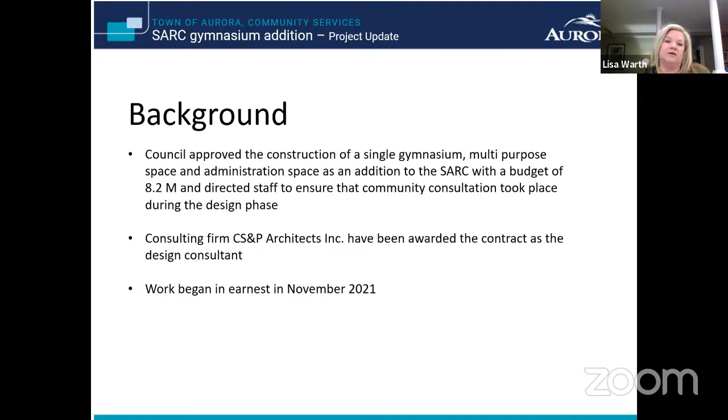So we started our work really in earnest with the consultants in November 2021.

As I mentioned, we did some community consultation, specifically with the groups interested in using this gym to provide services and programs to the community. We held sessions in November and December, and we also did written surveys for community groups who couldn't attend those sessions. We talked about the size of the gymnasium, usage, lighting, windows, acoustics, all those sorts of things, and we got some really good feedback and information.

One of the things that came out of that conversation was the desire for a double gymnasium, as it would allow for more formal competitive use. The user groups told us that a single gymnasium was just too small to run tournament-type events. We could still run competitive games, but not in that tournament format. There's also the potential that comes with having extra space for other uses like fitness classes, children's programs, summer camps, and special events like fairs and trade shows. A divider wall curtain could allow that space to be divided to accommodate multiple uses at the same time, or bigger groups of people accessing the space.

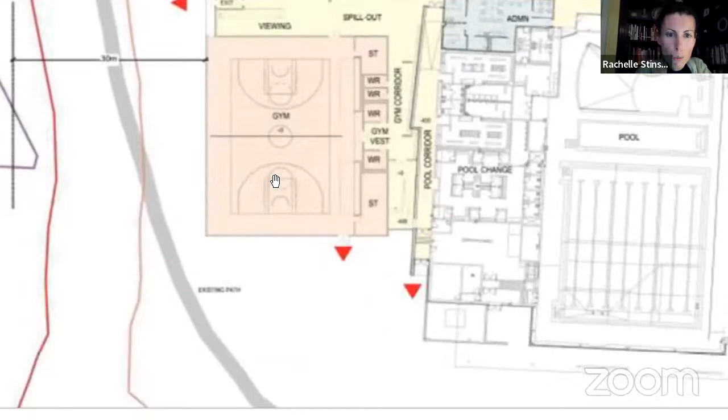I'll help get the juices flowing, Lisa. I discussed this with you in preliminary discussions. I can see on the map you've designated a couple of emergency exits—this one is existing, leaving the SARC pool, and this looks like a new exit coming out onto the wetlands, leading to the South Park or south end of the Stronach. Is there any indication we plan on creating some kind of level field here for this to be a proper emergency exit, because the grade there is quite significant? This is all staircases currently leading out of here. So if we're adding a whole new set of population coming into this gymnasium, I think that should be a strong consideration—really grading this area properly so that we have an actual emergency route that leads out over here to the east side of the Stronach.

Yeah, absolutely. That's been a repeated topic of conversation, and the consultants are very well aware of it. It hasn't been engineered yet—I don't know what it'll look like, but it's very much top of mind for the consultants in terms of that slope and that grade, and the fact that we need to engineer it in a way that's more even. And I know they weren't sure back in November, December. I don't know if there's any updates.

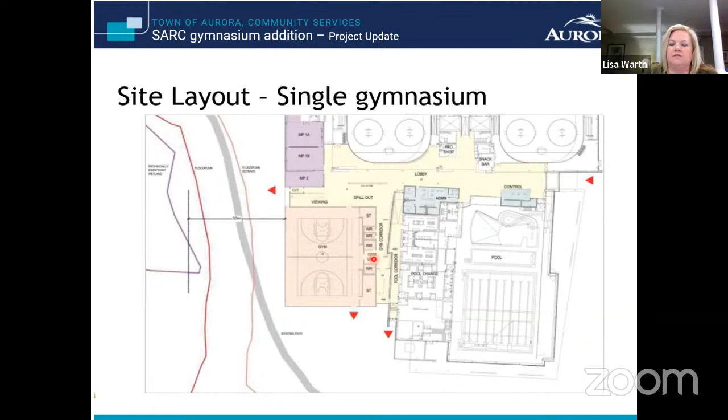Yeah, and then for the committee, just so you guys know, a couple of the discussion points I brought up were from December 14th when we met with the consultants. We discussed the grades, which I was just mentioning, and there was some discussion around the change rooms as well, the functionality there. Lisa, remind me, I think we were talking about a universal washroom being included, right?

So that was it, yep. Lisa did mention the auditory aspect, so part of the accessibility plan is doing proper acoustics at the Stronach Aurora Recreation Complex. That has been discussed as part of this gymnasium proposal, which was good. Accessibility equipment, dimmable lights, operators, and all those pieces have also been discussed as part of this original proposal. I wanted to let you guys know those things have been brought up to the consultant when I first met with them back in December.

Just food for thought in case you guys have any other questions for Lisa.

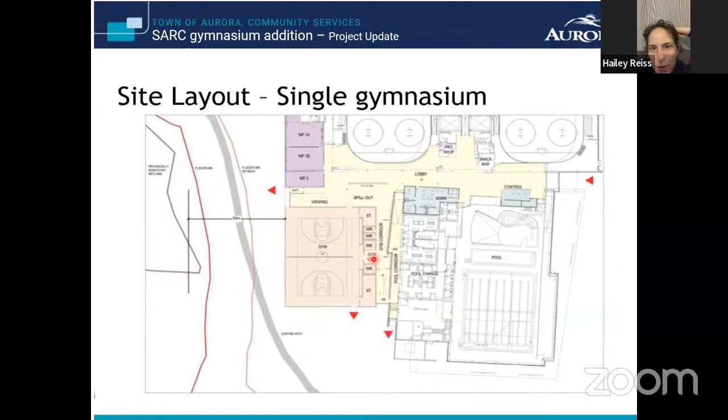I had a quick question. Can you hear me? I just can't tell. Yeah, okay. So I was just wondering, because you talked about seating and pull-out bleachers, is there a plan for spectator seating to be accessible in any way?

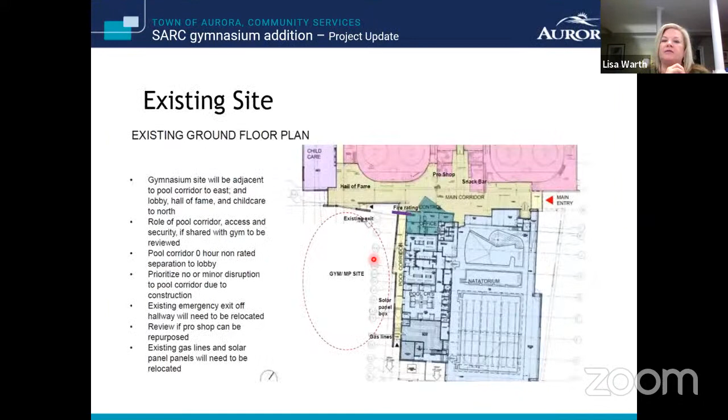Yes, and again it's all very preliminary, but there is seating. There will be additional seating within the gymnasium along the wall. What we do now at the leisure complex is just bring chairs in, since they don't have bleachers. The other thing is there will likely be a viewer area from the lobby, a glass panel, so if someone wanted to watch but didn't want to go into the gymnasium, they could just sit or stand and look right into the gym. So a couple of options there, but again, we're not finalized by any stretch.

Do we know when we'd go into a site plan application process for this, Lisa? Do we have a rough estimate? We're February now... June, okay, because we're a ways away from the final design, right? I was asking because I think all committees end in June, so if we wanted at least a round of committee comments prior to the election period, we would have to get it done before the June deadline essentially. Okay, so we'll keep that in mind, absolutely.

Yes, through you, Madam Chair, that is correct. All committee meetings will conclude in June.

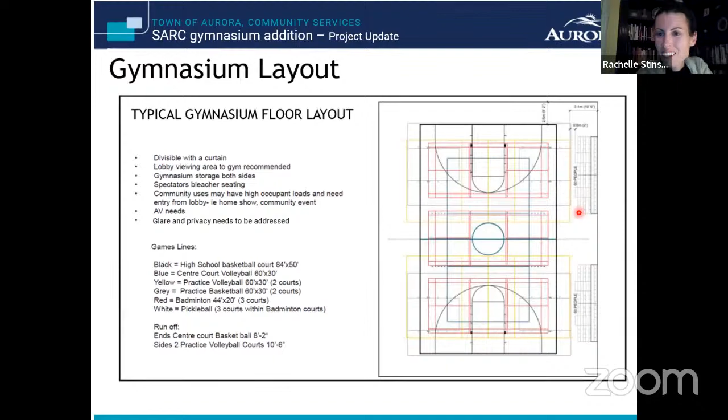Are there any further comments or questions for Lisa? Doesn't sound like there are. Thank you again, Lisa, for that presentation. You've given us a lot to think about. It's an exciting project, I think, and I look forward to seeing the site plans and viewing it more in detail.

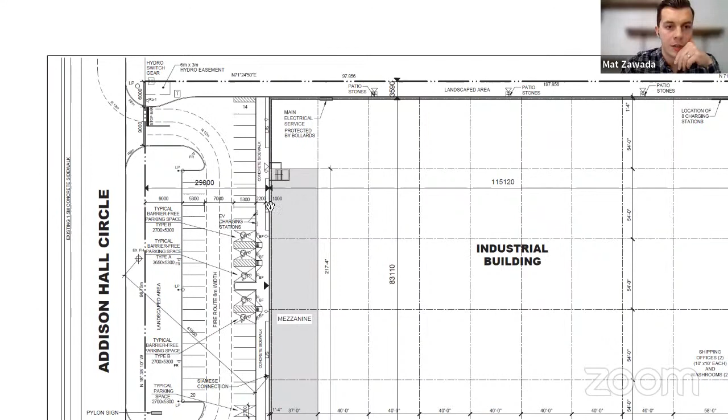As you can see, the industrial complex is quite simple. You have your entry coming into the main buildings. They do meet the requirements for barrier-free parking. They currently have 5 designated barrier-free spots, evenly distributed between type A and type B. There are 2 type A spots close to the entrance, and the outskirt ones are the type B's. Accessible aisles and curb depressions are included, and they have the barrier-free signage included in the site plan applications as well.

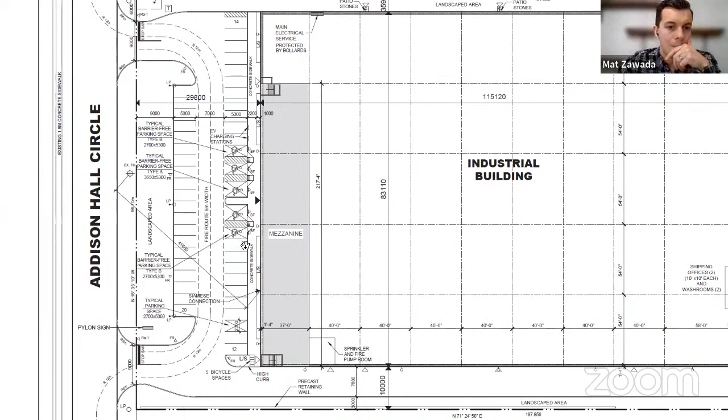They have an exterior path of travel running along the entire side of the building, leading up to the front entrance located right in the middle. And then they have a couple of emergency staircases on both sides of the building.

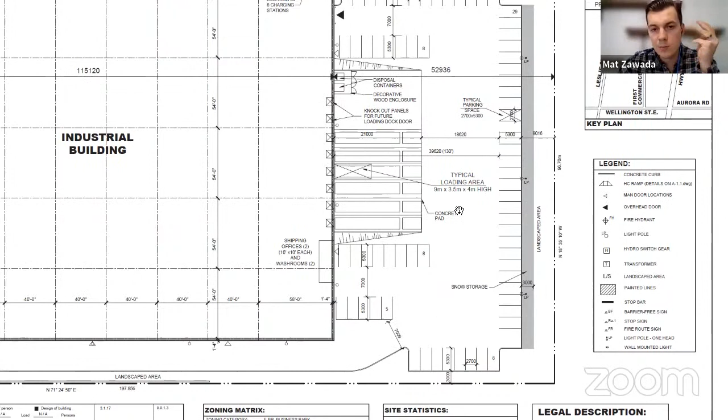Before I go into the comments, I'll show you guys very quickly the back side of the building as well. As they come around the side, they have additional parking over here—nothing for barrier-free parking. This is most likely going to be staff parking leading into the back of the building for those that don't require barrier-free parking. And you can see they have the ports for trucks to do their loading into the industrial building as well. So again, very, very simple site plan application.

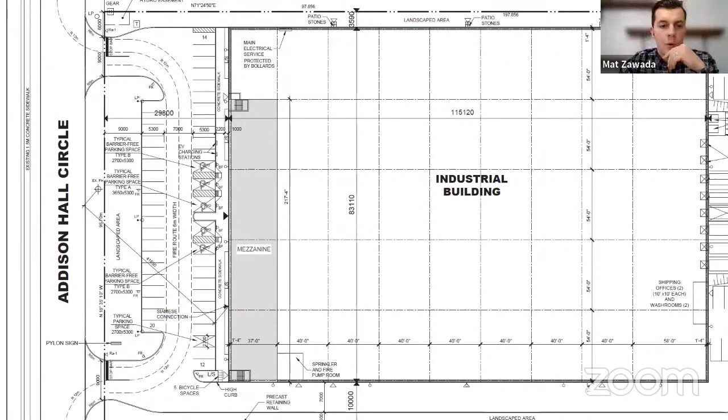In terms of comments provided for this site plan application, our regular one for the barrier-free entrances located, as discussed, in the back as well as the front, is for automatic door openers with the proper time delays to be included. Also, installation of proper tactile indicators. Since there are some proposed staircases for this building, that includes asking them for consideration towards the evacuation chairs that we've added as our standard in these site plan application requests.

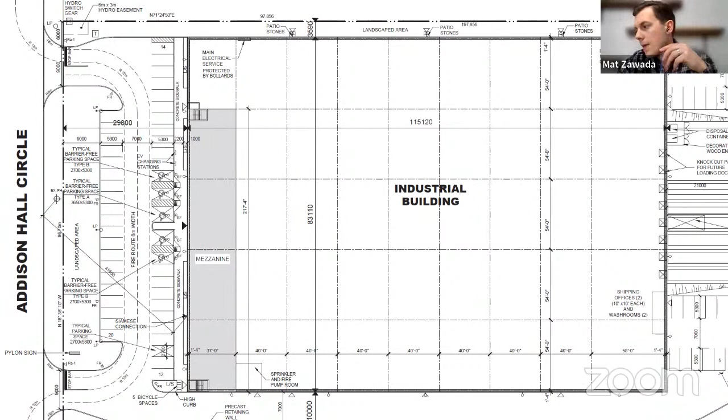Lastly, the one thing I caught here, and couldn't tell from the measurements—they have a bike rack located very close to the entrance of the emergency staircase. So I requested to ensure we at least have the 1.5 meter exterior path width required for anyone coming along this sidewalk. It's not indicated in the site plan application, so we'll see when they come back with their comments whether this meets it. If it does, it can stay, but most likely, based on what I'm seeing, I'm assuming they'll probably have to slide this a bit over onto the island, but we'll get confirmation on that a little bit later on.

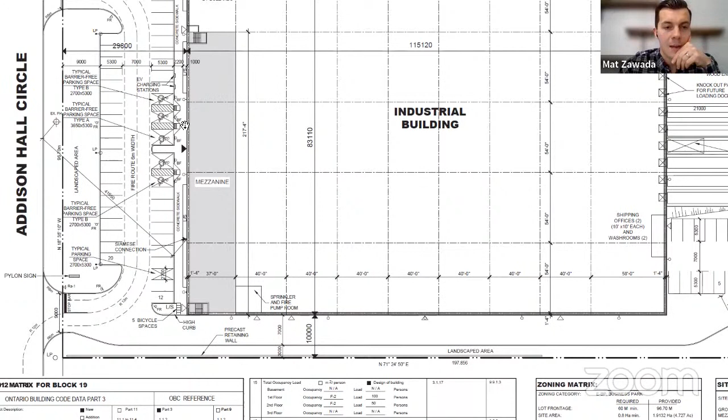The last comment I provided—I was speaking to the planners about this—it seems a little tight. You can see it is 2.2 meters, but I did request for rest areas to be included along the side of the building as well, because it is a fairly decent size industrial building. So rest areas should be included along the exterior path of travel, as long as the proposed rest areas don't impede on that 1.5 meter expectation we have for the concrete sidewalk.

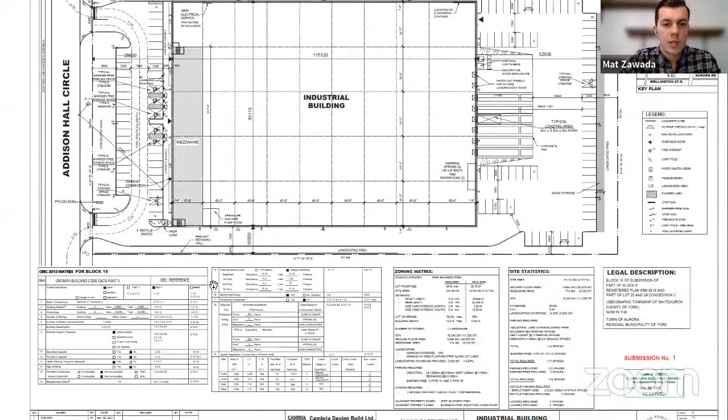I'm just going to jump over to the other drawings so we can go through them, and then if you guys have any questions, we can go through those as well.

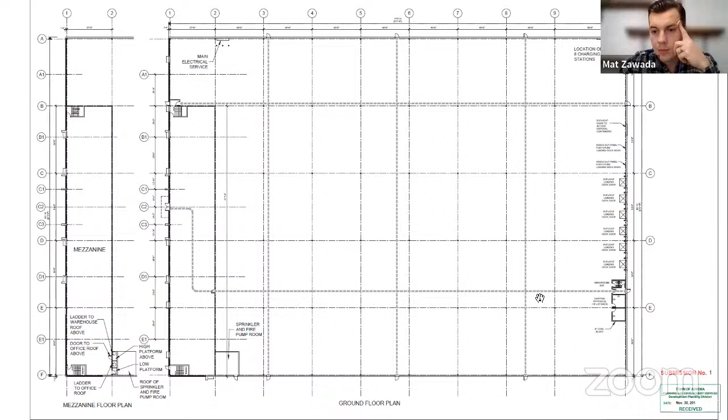So this is just taking a look at the interior. As you can see, absolutely basic at this point in the site plan application process. They just highlighted that there is a mezzanine, and again you can see we have our emergency staircases included, but not much more information past that. As you can see, there's the double doors that we requested for the automatic door openers, and then towards the back you have your loading ports, but nothing too crazy over here.

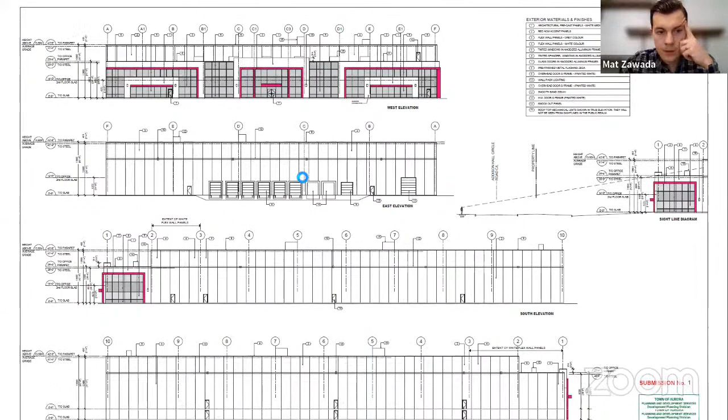Here's just an elevation view, so you can see the fronts and the backs of the building. Over here where you see these blue windows and panes, this is going to be the front of the building, and the loading docks on the back of the building over here. South elevation on this third picture, and then lastly, this is going to be your north. So these are the sides of your buildings.

And that was it. So like I said, extremely simple site plan application. I'm just going to jump back to the first one because that's realistically where you guys are going to have the most questions, if any. So the floor is open, Madam Chair, to the committee to request any other comments or questions.

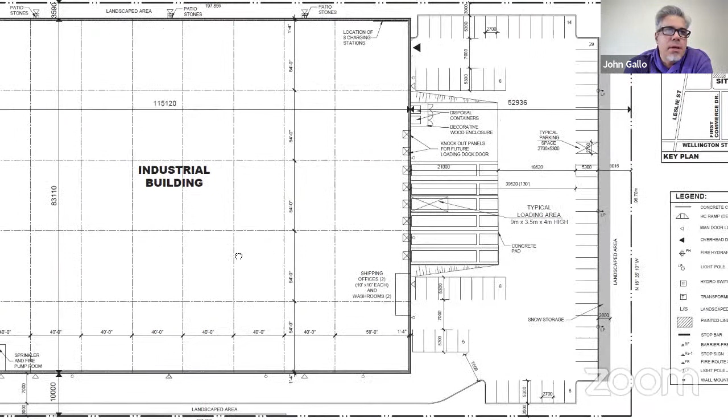All right, so are there any comments or questions from the committee? Madam Chair, could I just ask a question? Just washrooms, office space. I see some washrooms at the back. It just doesn't seem like it's a functioning space.

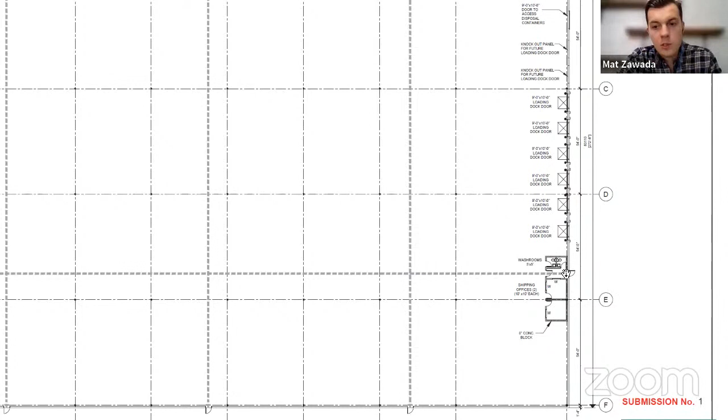Yeah, so they're not really giving us much detail in terms of what it's going to look like. You can see right now that they have indicated spaces for these washrooms. They're most likely going to have to update this based on when the planners give the Ontario Building Code piece on here, because if we zoom in, this is not going to be a sizable universal washroom. We can tack that comment onto our comments as well. But from what I'm seeing over here, this is not a universal washroom.

And based on the OBC, they do have to provide at least one in the new building. And then as you can see in the front over here, there's nothing else. But these ones, I can tell just off this, these are going to be a little bit too small to pass off as a universal washroom.

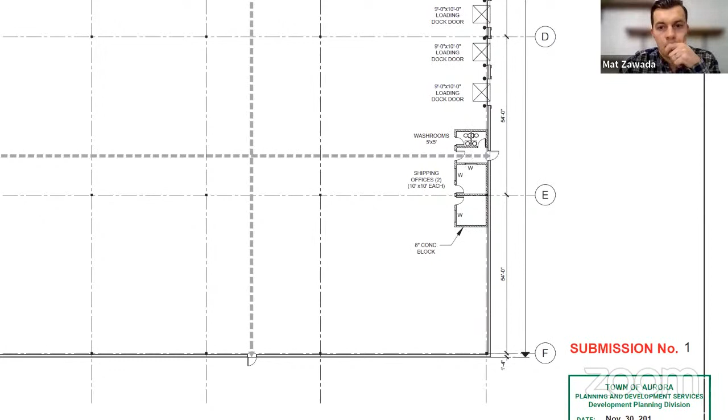We'll make those comments. Does this come back to us, or is this our one and only shot at any? Nope, nope. Usually we get about 2 to 3 submissions, so this will come back to us. Okay, that was it for me.

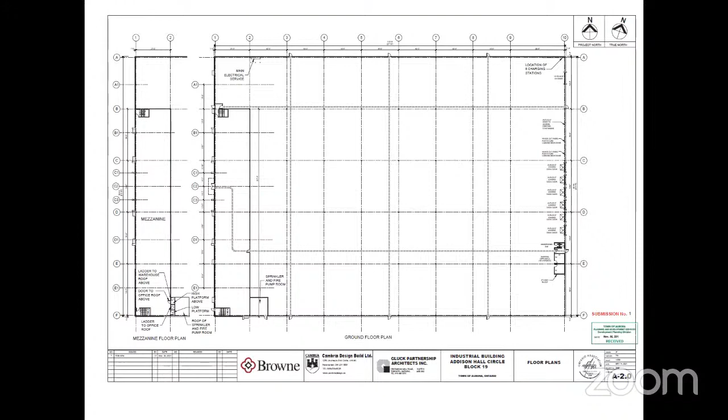Yep, I can add that comment in, just the washrooms at the back by the loading doors. One's probably a driver's washroom, the other one's probably an employee's washroom. So, and then the question about the mezzanine level, is that where the offices are going to be? We'll probably find out later, I guess.

Yeah, they're not giving much - we can zoom in on the area over here, but they really haven't provided too much information. You can see that they're indicating the ladder to the roof. They have a pump room located at the front of the building, but that's pretty much all they're indicating at this first stage in the submission.

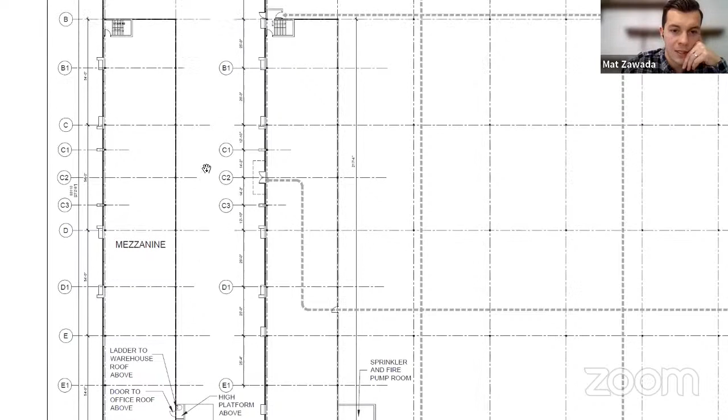Yeah, there's no other detail in this one. And then, not much at all. Let me just double check these ones, but I was pretty sure that there wasn't any indication, anything else here. More architectural than anything. And then let's just check - I think the elevations were next, right? Yeah, these ones don't indicate anything. So like I said, these are very preliminary drawings at this point.

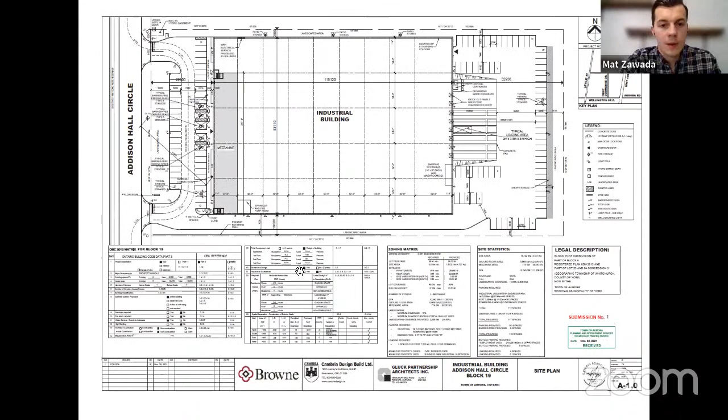So not too much on the insides, but I can also put the comment in. Usually they're pretty good about giving us the interior drawings on the second, third submissions, but I can put a note in here as well that we're requesting them on the second submission.

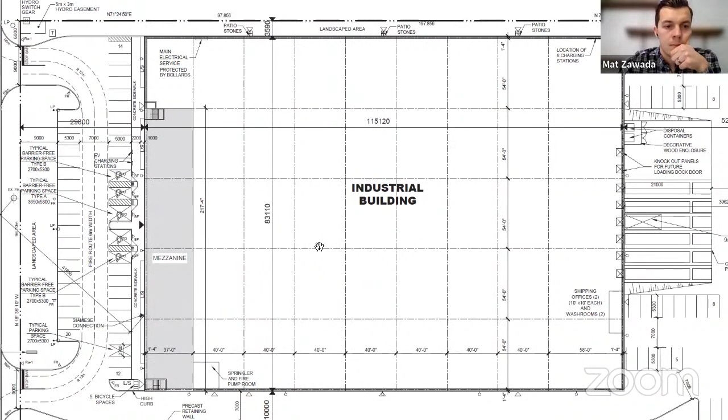Are there any further comments or questions? Doesn't sound like it.

Yeah, and the only thing that I might add, and I know we talked about this, I didn't make this comment because I don't see an existing exterior path of travel over here, but it's an industrial building, so you're not going to really have a lot of public coming in here unless they're visiting for the building specifically. It doesn't look like they have an exterior path of travel running along Addison Hall here for us to even request a crosswalk or a safe path into the industrial building off of.

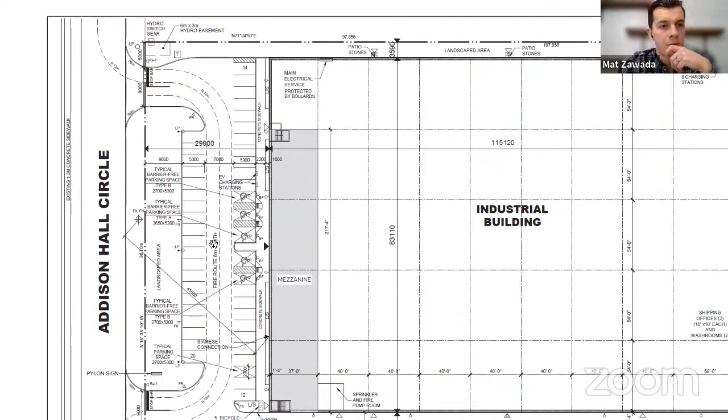Yeah, that was my biggest sort of wondering, whether there would be any kind of need for public access here. Because you can see on the opposite side of Addison, there's the existing concrete sidewalk, but I don't think an industrial building is really going to warrant us requesting a crosswalk going in there. No.

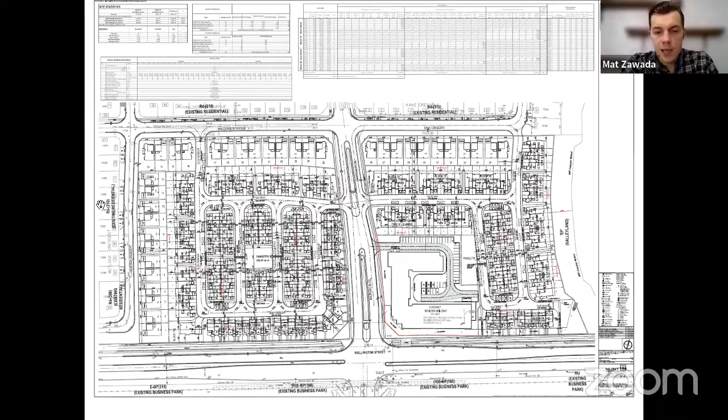Thank you very much, Madam Chair. So we have seen this a couple of times at this point. I wanted to give you a quick update and a final concern that we got vetoed on, so I want to go over everything.

Previously, Matthew, you were requesting a 4-way stop. I spoke to the transportation analyst about it, and it doesn't seem like it's warranted in this neighborhood for that area. We did get the crosswalks for the parkettes, so that was good.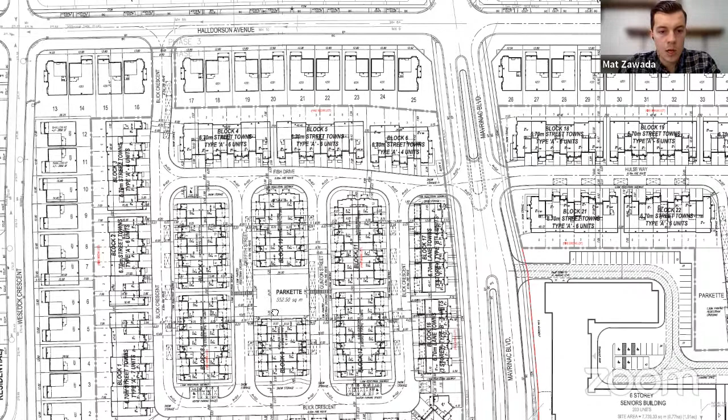Originally they were mentioning they didn't want to go through the parking they added in over there, and the transportation analyst and myself had some long conversations with the planning team about this piece. But we did get the crosswalks installed coming into the park on the west side and the east side as well. As you can see, there is a crosswalk that has been added in, so there are paths of travel leading into each of the parks, creating pretty decent connectivity in the neighborhood.

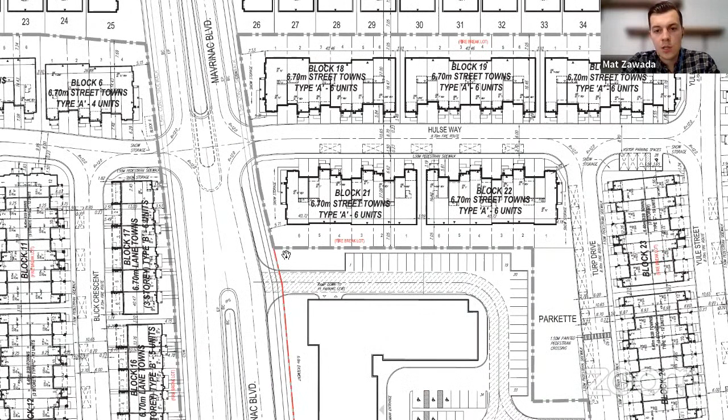The one piece I wanted to mention to you, and there's not too much debate, is that I made comments on behalf of the committee on this piece. One of the issues I had with this site plan application is the exterior path of travel, as you can see, leading from Wellington past the seniors building.

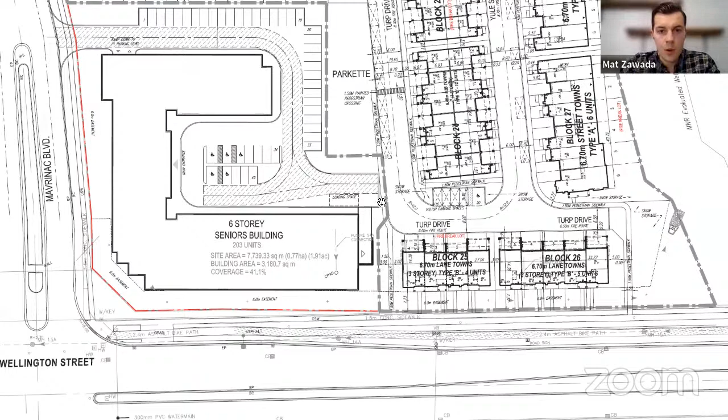So there was this addition which the committee requested, and it was received. We had the exterior path of travel added in next to the seniors building, as well as the back of the neighborhood leading into Turp Drive. Fantastic. The issue is this sidewalk leads pretty much up to the park and originally stopped here.

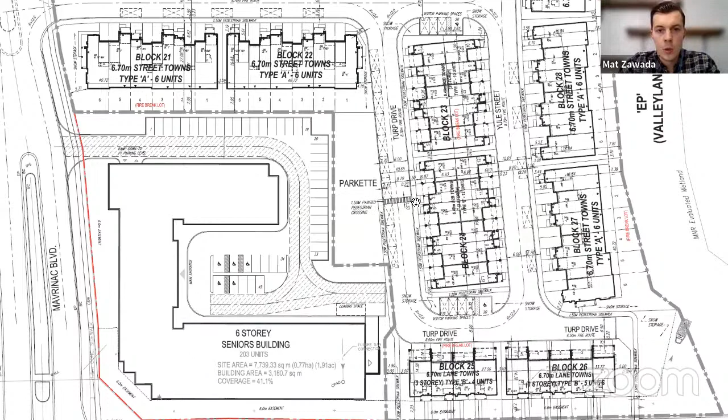So we were requesting that instead of an individual coming from the seniors building, for example, or Wellington, climbing up through the sidewalk, the current way this has been mapped out requires people to take the crosswalk going right across the street, further northbound on Turp Drive all the way up to the top, and then cross again to get to Hulse in order to then go over to Mavrinac.

What I was kind of battling with, and the transportation analyst was completely on our side with this, and we went back and forth with the planning team on this piece, is we really wanted this exterior path of travel to continue right through the parkette next to the home over here and then wrap around Hulse.

There was a lot of pushback from the developer, and ultimately the now previous director of planning and development, David Waters, just retired, so that's why he's no longer there. But he did put a final stamp on this, saying that this will be the approved exterior path of travel. So I did go to bat for the committee on really pushing for this exterior path of travel.

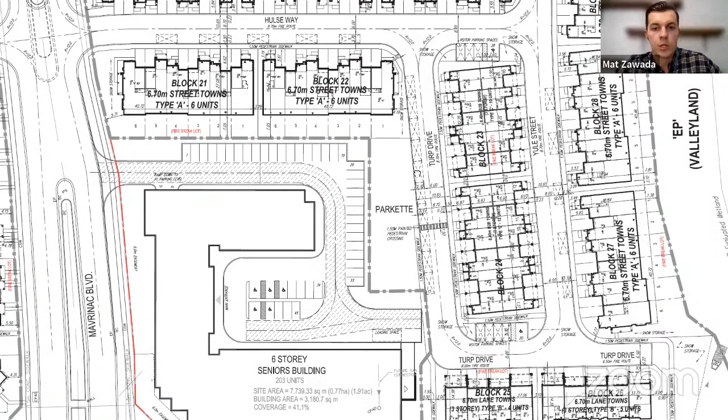to connect and have that true connectivity on Turp Drive all the way up to Hulse. But it looks like the director and the developer decided that ultimately it's just going to be this kind of zigzag motion in the neighborhood in order to go northbound all the way up to Hulse Way. So I wanted to bring this up, that I made those comments on behalf of the committee.

I don't know that there's really room or opportunity for us to continue to push this piece, but both myself and the transportation analyst did say that we do not approve or like that the plan does not include the exterior path of travel. So they did not have our blessing on this piece, but it looks like they are going to proceed with it regardless. I wanted to let the committee know, because we've taken a look at this quite a bit in the last couple of months, and that's the update on where we're at with this subdivision on Mavrinac Boulevard. Any questions or comments?

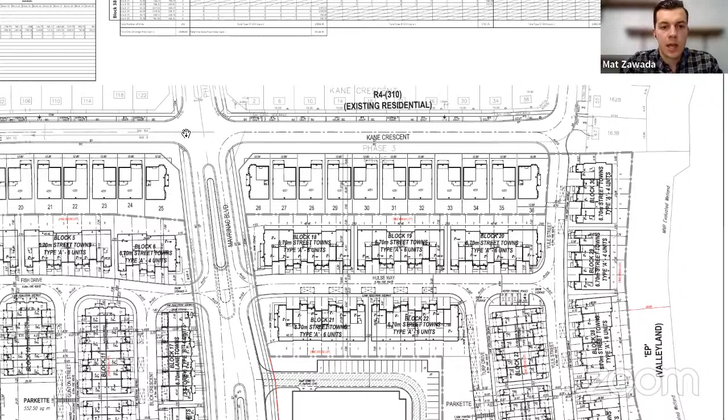So the stop sign said no, that was the one up at this new intersection. Michael Batt's fantastic, he's all for adding these pieces, but he said it really didn't warrant it at this time, so we're not going ahead with the four-way stops over here. He was the one fighting with us to get these crosswalks added in, because we did have some pushback about the crosswalks, and he was also fighting with us to try to get this exterior path of travel added in towards Hulse.

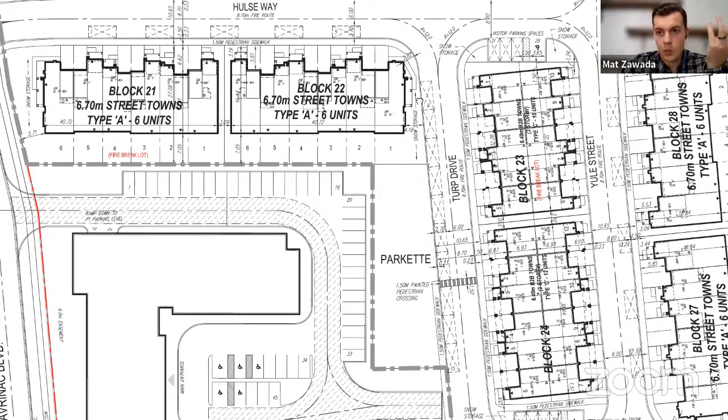So I'm disappointed. The rationale, just so everybody knows, I think there's a couple of zoning pieces where there just isn't enough space. I think there's an opportunity for there to be an exemption for this to be more usable for those coming across. I know Markham is big on ensuring that both sides of the street do have sidewalks in their neighborhoods, so we did try to make this push, but ultimately we were shut down. So again, wanted to give you guys the update on that piece and where we stand on this specific area.

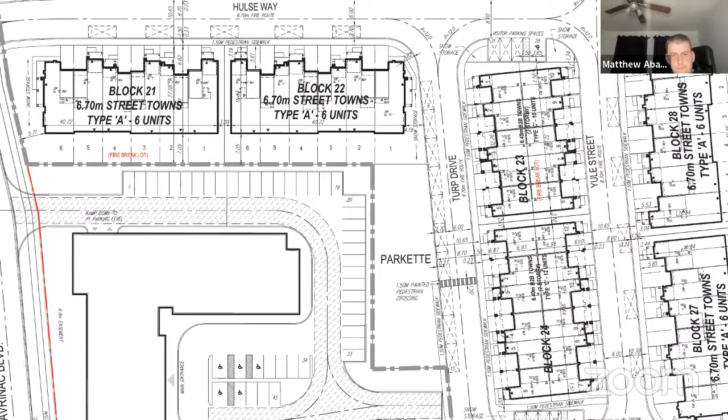Madam Chair, if I can just ask a question. This was at the General Committee, I believe, last week. There was some type of discussion — I'd have to look back at the video — but council hasn't approved the site plan yet. That will come at the end of the month. I'm just wondering whether your comments regarding that, while the director may not have liked it and the developer may not have liked it, that doesn't necessarily mean council can't push for it. So I'm wondering if in the minutes or somewhere your comments or objection would be there so that council can at least be aware of it and have some type of discussion.

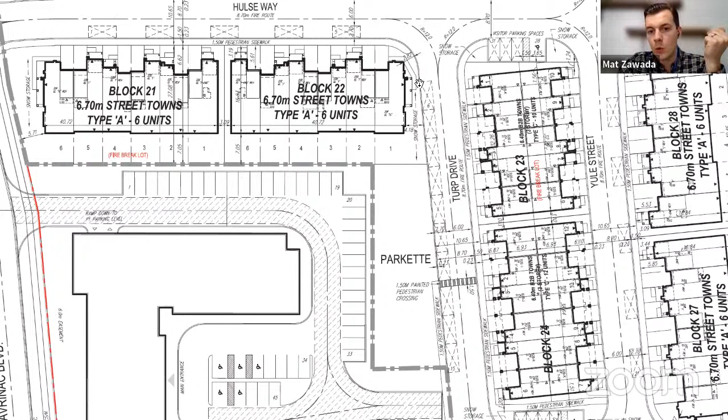Yeah, I know Ashita will be taking the minutes, so it will be included in that piece — Ashita, correct me if I'm wrong. And then Councillor Gallo, I don't mind sending you the memorandum that both myself and Michael put in on the site plan application. Again, if ultimately there are some serious zoning issues, I understand, but I know that we and council members look at this on a regular basis where we have exemptions to the zoning bylaws on these pieces. I think it really makes true sense for this to be one — we're talking about a small stint of sidewalk over here where we'd have a truly connected side of the road, rather than asking an individual to cross the road twice just to go northbound on this street. So I think it makes the most sense. If you have anything, I'll commit to at least getting better informed on what the details were or what the rationale was on both sides.

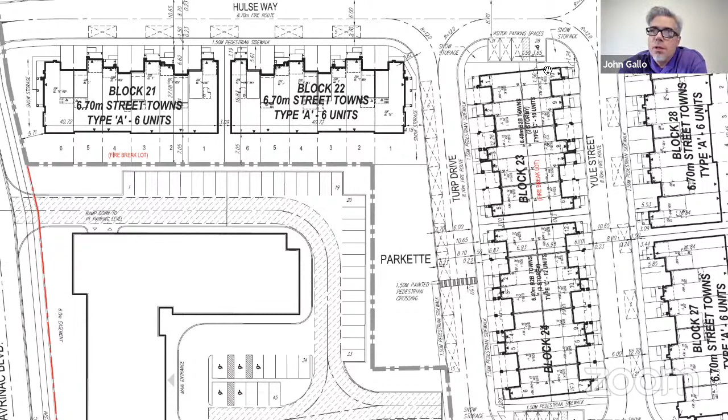Yep, no problem, I have no problem bringing it up at council. The other thing — I think there was a discussion about the visitor parking spots on block 23 there, and something to do with, I don't know if it was the exterior path of travel, but there was an issue. Is it these ones up on the top? Yeah, on those ones there at the top, and just where that snow storage or turning that corner or sidewalk was — I don't know if you're aware of any issues in that corner.

When I was in that meeting with planning, this piece was not being discussed. I think your meeting with council may have been after we met with David — this was probably end of November, beginning of December, so a couple of months back at this point. So the discussion you guys may have had over here may have been a little bit afterwards. But I do see the point that may have been discussed, right? You do have the exterior path of travel going around here that essentially ends at the visitor parking.

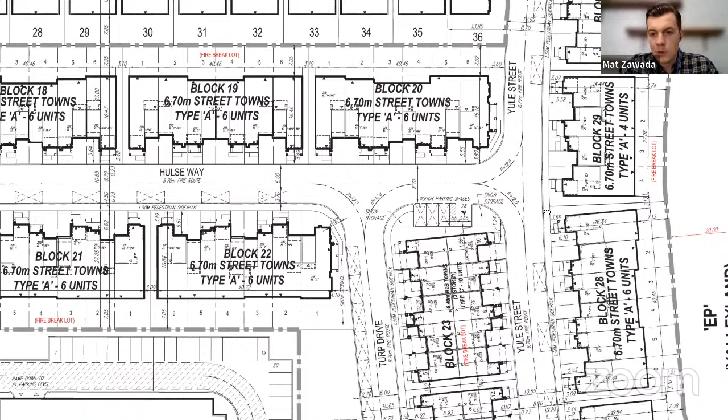And then really the only other sidewalk is located over here on block 28. And then what does this look like — block 29, essentially. So we're asking people, if you're in these blocks, to essentially walk southbound, cross to this sidewalk, and then again you're having that same journey, right, all the way across over here just to go on Hulse. So there are some connectivity issues with the exterior paths of travel in this neighborhood where I think it's just lacking, focusing on the Auroran, right?

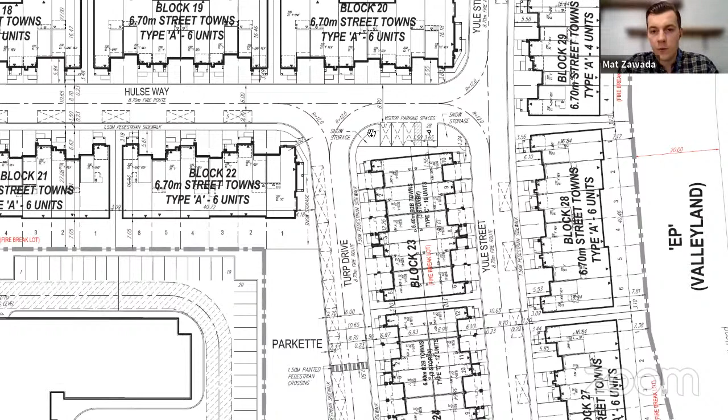I know this might be beneficial for the developer to keep costs where they are, but for Town of Aurora residents, we should be pushing for true connectivity for these exterior paths of travel, to make sure people are able to walk around, enjoy the neighborhood, walk their dogs, and walk around with their kids and families in a safe manner, without having to go all the way down, cross here, and then go back across. So you're going to have a lot of people jaywalking essentially, which is not something we'd be promoting as town staff members.

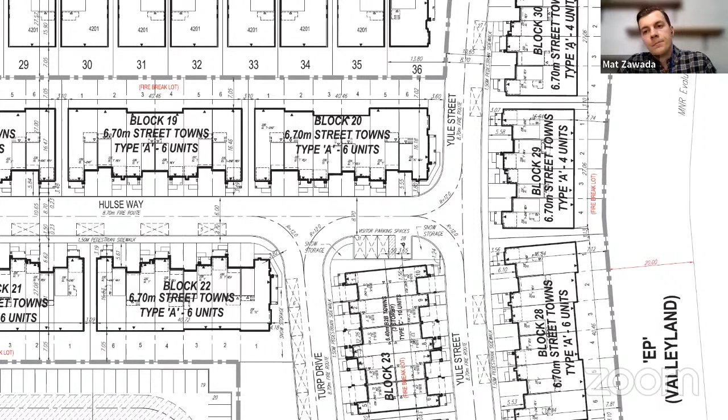Okay, so if you do have any more information, send it to me, and I'll commit to at least have a discussion at council when it comes up. Absolutely, I can get that over to you tonight. Okay, thank you.

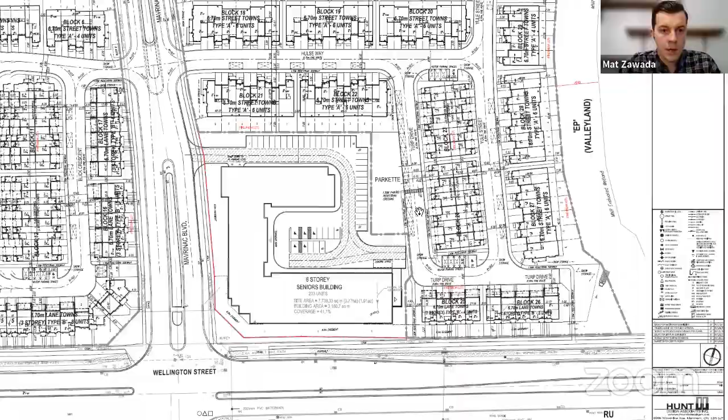Can you zoom out and go to the other block? I just want to see something. The west side, Matthew? Yes, please. Where do you want me to go in on? I just want to see something on the left side. I just thought of something, but Block 3, 2, 1, where are we looking? Over here.

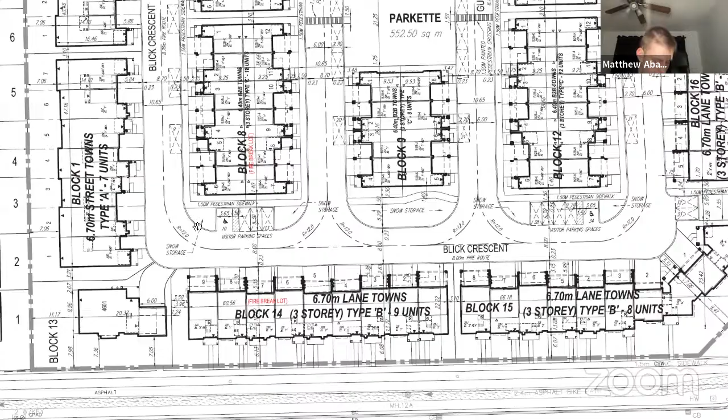Okay, 14, 8. Do you want me to zoom in a little bit more? I know you guys are on screens here. Because I'm looking at the west section of this development that's bordering Weslock Crescent. Yeah, the existing residential neighborhood there.

I'm just trying to see what the setback is from the road to their backyards. That's what I'm trying to figure out. Oh, those are houses there. These are, yes, yeah. Okay.

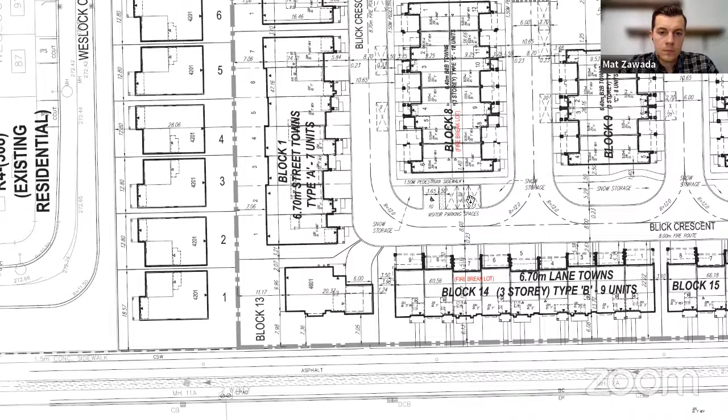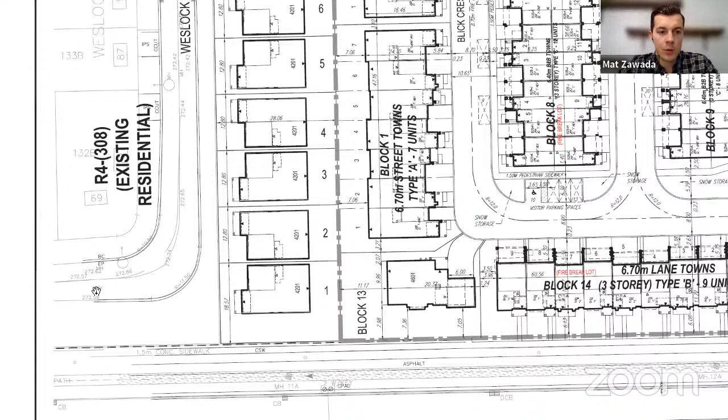So, because I know that it's kind of weird, because that street there that they're building onto the existing one with the new houses has absolutely no sidewalks on it. Yeah, there was nothing here. And then I think the first sidewalk for Weslock is around this bend, where the next street starts up over here on the very west side.

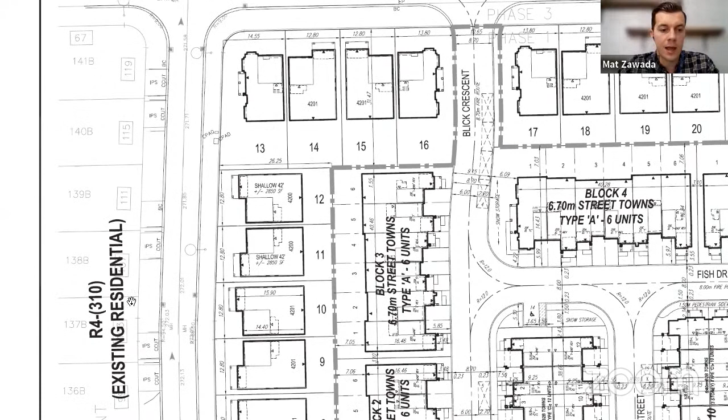Obviously we can't see on this site plan, but I have driven through this neighborhood and I believe it starts on that side. But you're correct. From what I recollect driving through here months ago, I don't think there was any exterior path of travel that runs on the existing side. We wouldn't be able to comment on it in this application regardless, but I do think you're right that there was no exterior path of travel there.

Well, we can comment on the new block. Yeah, on the new block we can. But these are the backyards on this side. Oh, that's a backyard. Are you sure that's backyards? I think those look like the fronts. It's hard to say because they have an entrance point and an entrance point here, so I can't say for certain.

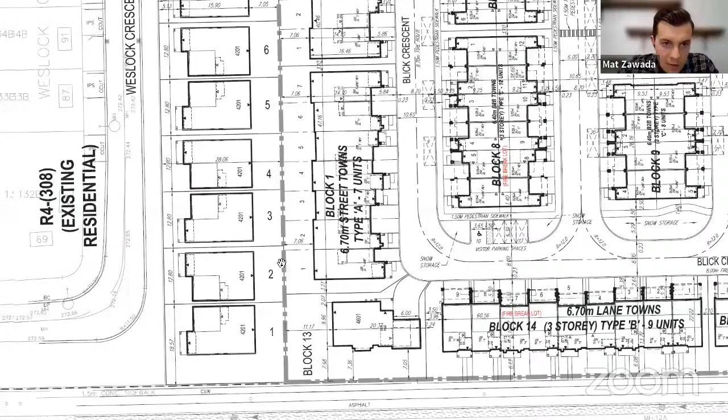This is the one block here. That's the townhouse block, that's a backyard. And then that's a new house facing onto the existing road. Yeah, so these might

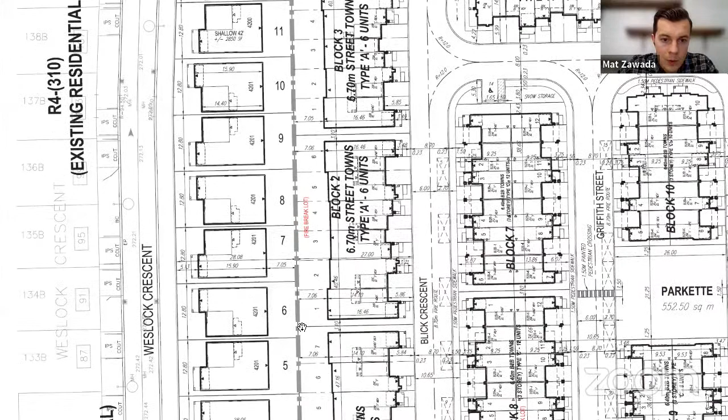be existing though, because it looks like the boundary is this gray line here, Matthew. You see it running along here? Yeah. So these are existing homes already. No, they're not on Google. Yeah, I don't know, I'm just talking boundaries here. I can see, I can for sure make the comment in there. I'm not saying that at all, but I'm just saying what it looks like is they're showing the lineage going here, but we can't definitively say that.

So you're requesting for Weslock to have an exterior path of travel on this side? Yeah, on the east side of Weslock. Okay. No problem.

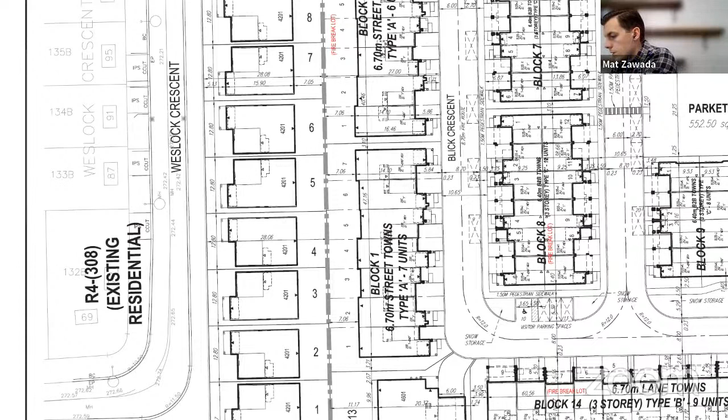So, notes to council, we want an exterior path of travel, because eventually if Weslock does the east side and it ends at the curve on Weslock, in the future if the town ever has money to spare, they can connect it to Wellington via the connection down the street. Yep, so I've made that note in there.

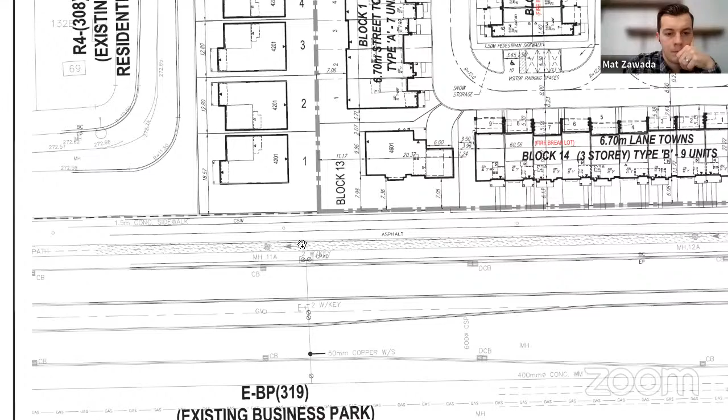Okay, that's my comment, that's all I wanted to know. Thank you. No, thank you, Matthew. Any other comments?

So I don't think this is the end of us seeing this one. I can't say for certain, but we'll see. Like Councillor Galler was mentioning, it will go through council and he'll have an opportunity to bring up her point. Matthew, go ahead, I have another question.

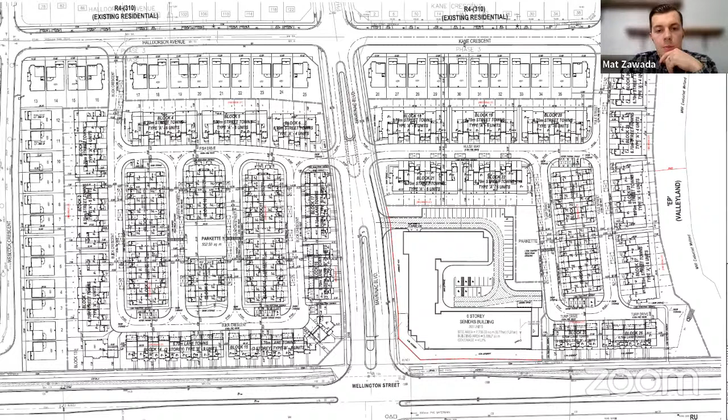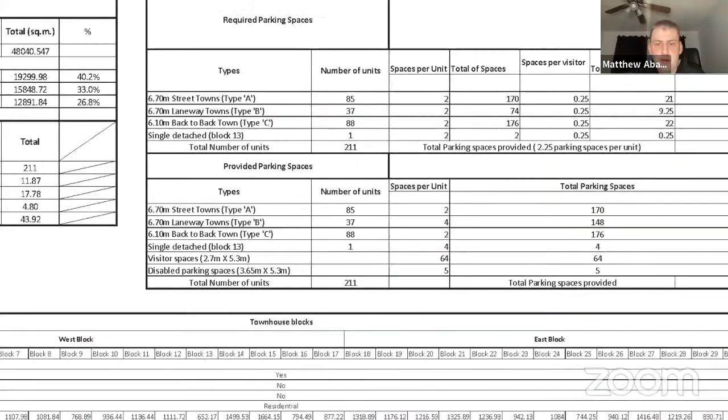Top right of the page where your mouse is, right here. Keep going up, zoom into where the crescent is... yeah, I'm coming in. Yep, that's Kane Crescent. So there's a sidewalk that ends here, but it doesn't connect to this sidewalk in the picture. So the new stuff doesn't connect with the old section.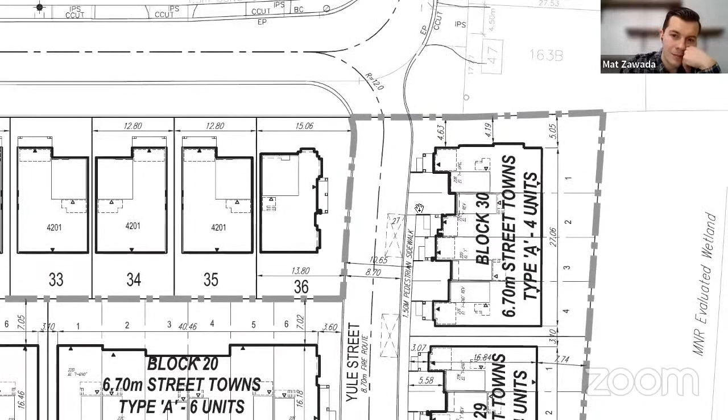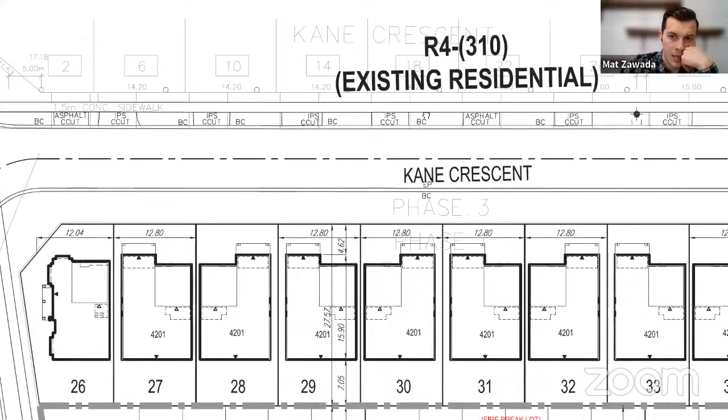Yeah, I'm wondering if this is theirs. It looks like they ended at the driveway of this home. And you're right that there is no connectivity over to the existing neighborhood either. On Google, it says the existing sidewalk ends at 51, but doesn't go through 51 or 47's driveway. Because over here on Mavernack, there's an exterior path of travel that goes across through Kane. We run it along Kane, the exterior path of travel ends. You can see the 1.5 and just above the IPS one, whatever that is. But I'm not seeing any connectivity points here. So that's not good. So maybe there's that addition.

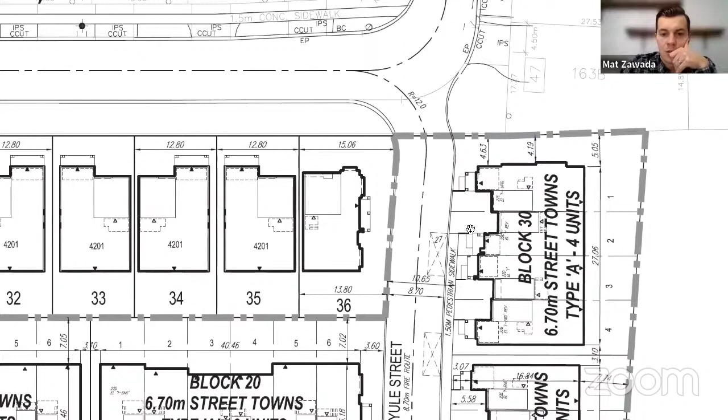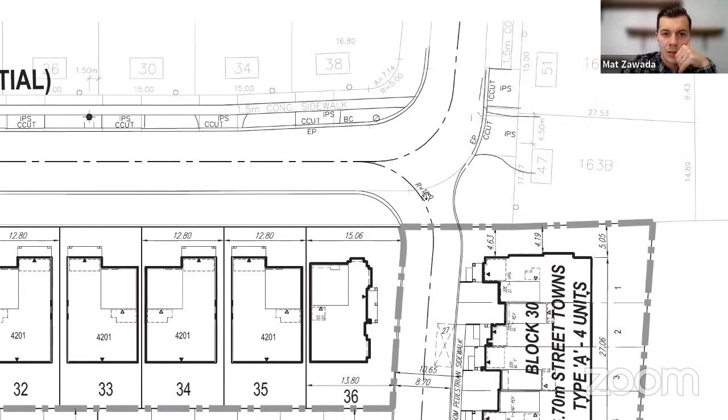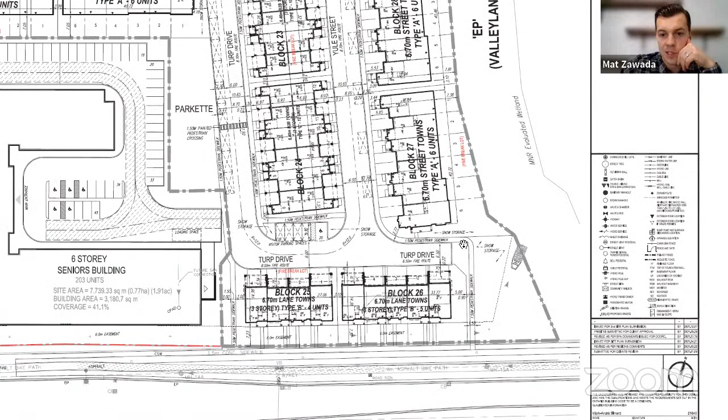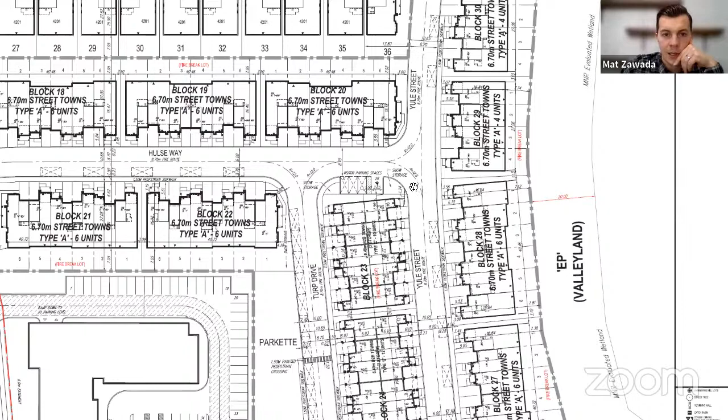I'm curious to see what they'll say here as well. Like we were talking about at council, adding in an existing crosswalk or path here going across. We can definitely point out this piece, Matthew, going across through Kane and connecting to the existing path of travel. That's what I was mentioning. It's unfortunate that there's just these dead ends, right? Even when we were first looking at these applications, there was a request for this connectivity, because this path usually ended similar to what we're seeing on the north side, Matthew - same thing on the south side. So we requested this additional pathway to lead over to Wellington that was added in. Same thing on the senior side. I know we've talked about the west side, but apparently the grade is just too steep for it to work. But we can most definitely bring up the Kane Crescent area, and I'll try to find out more about the plan over here. I'm assuming they'll come back saying there's a path of travel through the south side. I don't know if they'll budge on this piece, but we can definitely bring it up.

You'd think the cars are living in these houses, not the people.

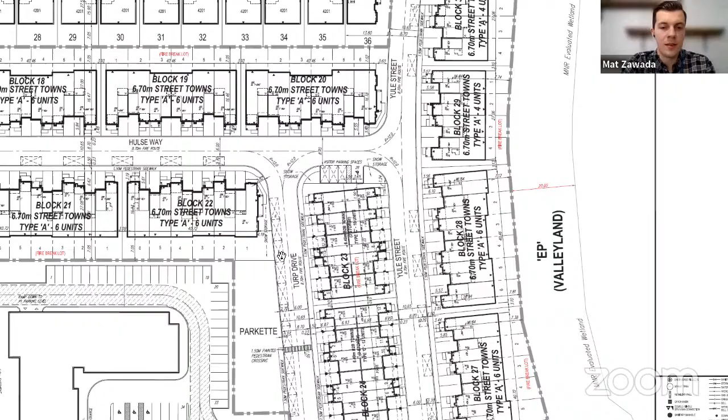Yeah, they should design them with sidewalks - that's what I was mentioning. We want to encourage people being active in the neighborhoods, so we've got to make sure there are proper paths of travel for people to safely go through the neighborhood and enjoy their areas.

Good discussion. Any other questions?

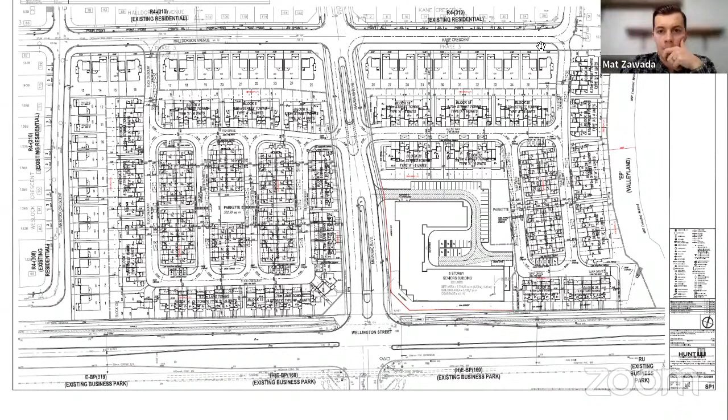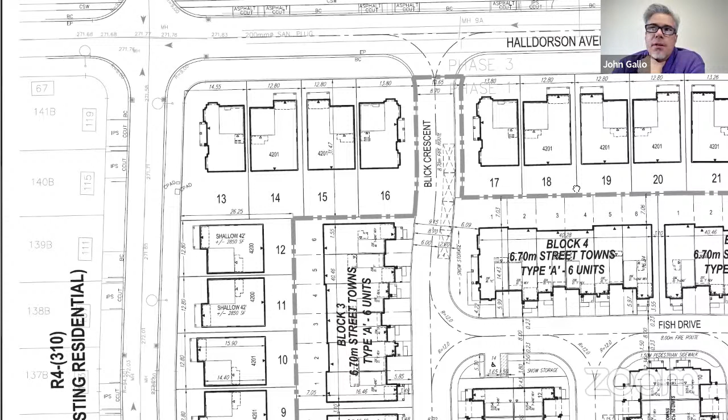Okie dokes, Madam Chair, I think we're good on this piece.

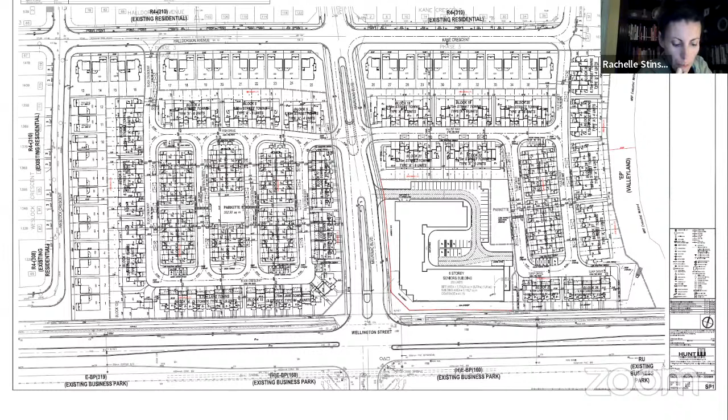Matthew, thanks Matthew, and a second. Joanne, thank you Joanne. Okay Matt, do you want to lead us on this? Yeah, absolutely. Joanne, I didn't know you joined us - welcome, I didn't see you at the beginning of the meeting. I've been here since ten after. You quietly snuck in. I just snuck in, yes, I'm sorry, I sat down and didn't realize the time had gone by. That's all righty, so - perfect.

Thank you very much, Madam Chair. So for the accessibility plan, just to give you guys an update, we have submitted the new accessibility plan, our 2022 to 2026, to go over to general committee - or general council, I'm not sure - for February 15th. That would be next week, where they'll have the opportunity to receive the plan. The recommendation is for approval, or for council to give us direction on any changes they'd like to see. So the good news is our plan is going through next week for council to take a look at, and then we can start working on our objectives for the 2022 to 2026 plan.